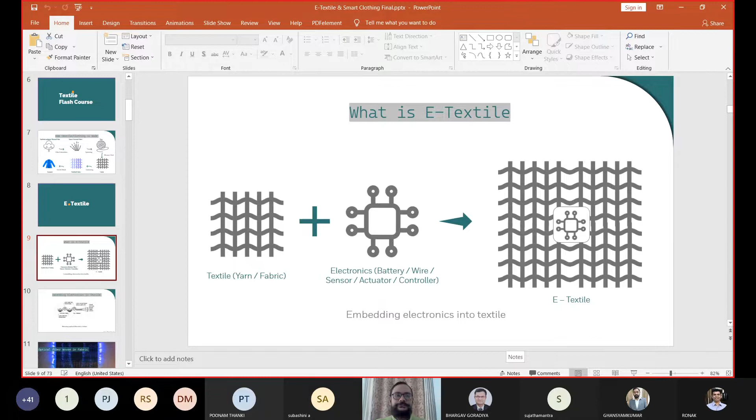So we are talking about this textile flash course. Basically, when we talk about textiles, it starts from either a synthetic polymer - like well-known polyesters, nylons - or natural fibers, like cotton fiber, which everybody knows about. Once we have this fiber in natural or synthetic form, we go for fiber extraction. Basically what we are doing here is extracting meaningful fibers that can be processed further. So these are straight and parallel fibers of a certain length.

This is done by the process of fiber extraction, and in synthetic terms it's done by melt spinning, or different kinds of spinning techniques. Then these fibers are aggregated together and twisted to form a long strand, which is generally referred to as yarn, or dhaga in your language. So this becomes now a long strand.

Once this long strand is available to us, what we do is a kind of gridding, an interlacement process, which can be called weaving. There are two types of fabrics, as you might already know. One, like in trousers, are woven fabrics, done through weaving. And the t-shirts you wear come from the knitting process, so these are more stretchy and flexible. These are the two processes of aggregating all these yarns together to make a structure which is almost a 2D structure, although it has a third dimension that we don't generally talk about much.

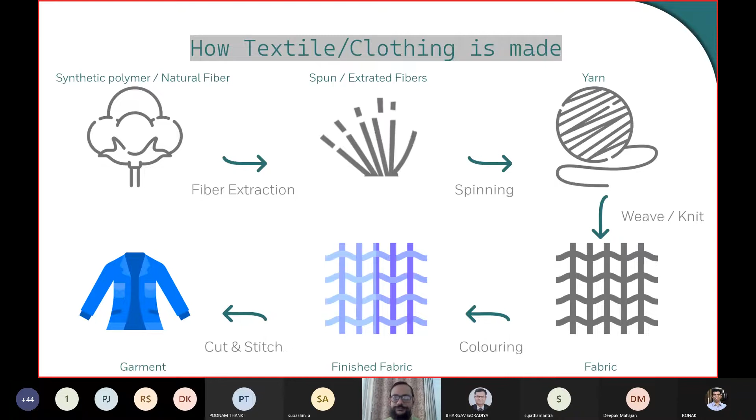So coming to e-textiles, what is e-textiles? A very basic definition - if you go by definitions on the internet, there are a lot of definitions and a lot of misinterpretation. A lot of people call a small patch attached as an e-textile, so there's confusion there. We've tried to keep it simple: you have a textile, maybe in terms of yarn, fabric form, or garment form, and then you add electronics to it - a battery, wire, sensor, actuator, or controller. Once you embed that into the textile, we generally refer to it as an e-textile.

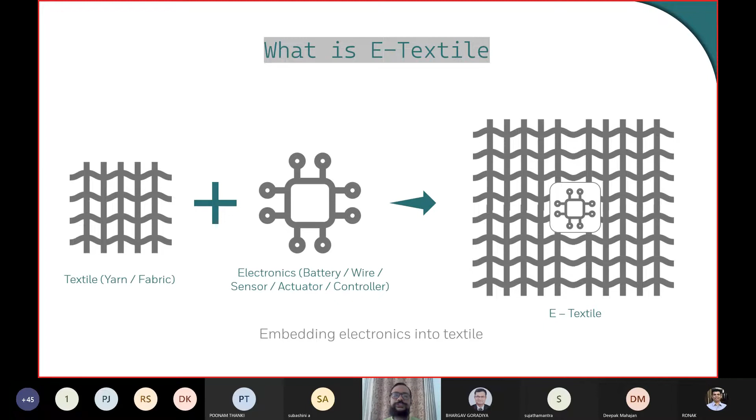Let's see an example. As I mentioned, in the process of weaving you have two different sets of yarns in two directions - X and Y directions. Here, we are using a polymeric-based optical fiber in the weaving process, and it gets integrated in the form of a fabric. Once integrated, you supply light from one end, and at some point where the bending on the optical fiber is enough, some light escapes due to the angle of reflectance, and that shows on top of the fabric. This is an example of how you embed an optical fiber and light-based system into textiles - an example of an e-textile.

As you can see in this picture, optical fibers have been woven with conventional fibers, and there's diffusion happening at certain places - these are the places where the diffusion occurs. This can give an aesthetic look, so this is also an example of an e-textile.

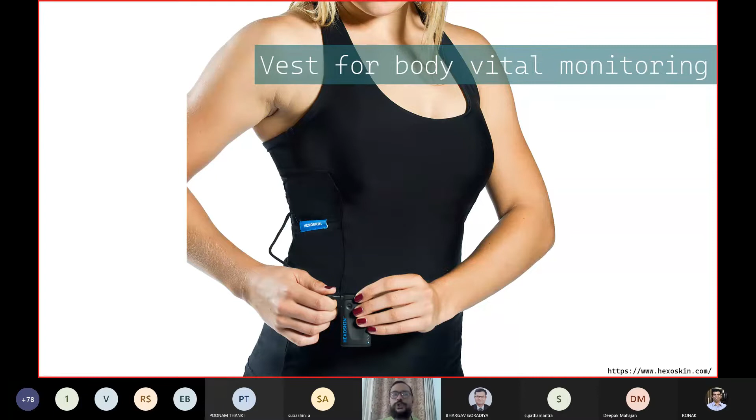Again, it's IP rated to an extent, but they don't recommend washing this along with the garment. These kind of textiles, the conductive threads and everything you see, are completely washable, and they can last up to 40 washes, 40 normal washes, or maybe if you're going very severely on a washing machine, maybe 30 to 40 washes. So again, it depends on the technology and how you do some kind of protection here.

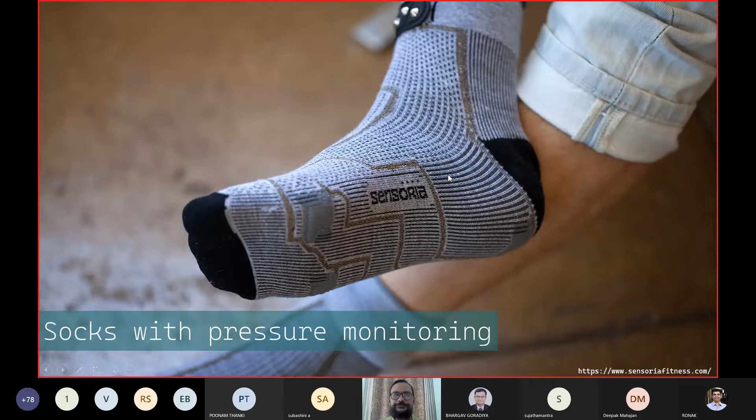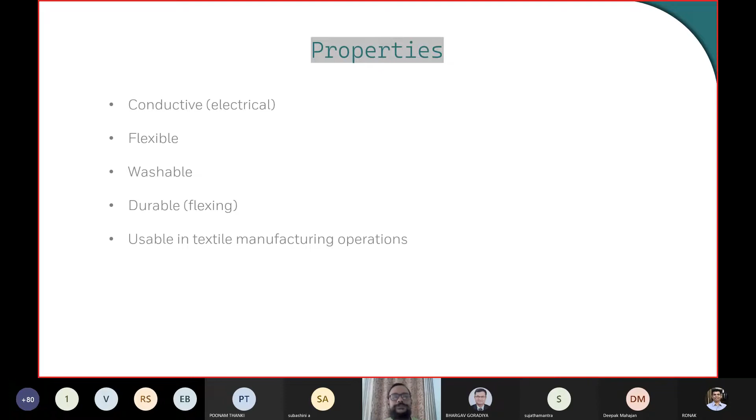So let's see the first category of the materials. These materials would be the basic ones. We start from the polymers, the conductive polymers. Examples are polyaniline, polypyrrole, and this is a very big name, so we use the short form PEDOT and PSS, polystyrene sulfonate. And then graphene. Graphene basically is not a polymer, but because graphene is used to an extent, I have just included it in this instead of making a different slide for only graphene.

So the conductivity values of these kind of polymers are in the range of the beginning of a semiconductor to the beginning of a metallic conductor. So these are not very highly conductive like copper and all, but to an extent they do a job of conducting electricity with small amount of resistance, and that should work for you to light up LEDs or any other kind of signal transmission and all.

The issues with this kind of polymer is that compared to the polyesters and nylons which we wear daily, these polymers have very poor mechanical property. So they will have to be supported. Basically what would happen is you would have a polyester substrate or a fabric substrate, which is the main load bearing component that would take the forces, and on top of that you can do some kind of coating of these kind of conductive materials.

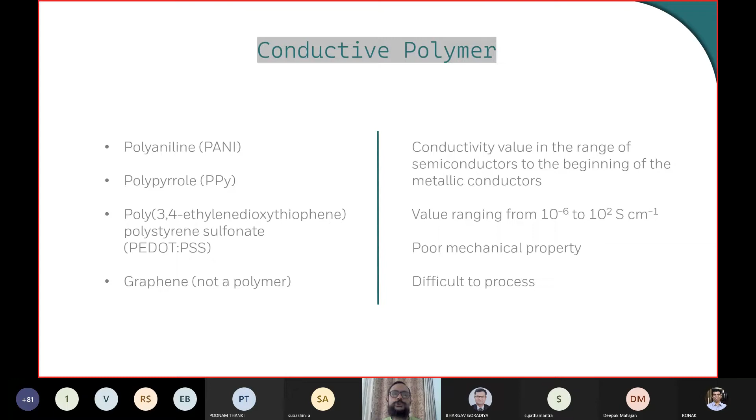One more disadvantage here is that these materials are also difficult to process. There is oxidization happening during the use, and also to coat it. They are not very soluble in the solvents, so if it is not soluble in solvents, it's difficult to process. That's why the processability of these materials is a little bit difficult.

Now, how can we use these kind of materials? What we can do is in situ polymerization on a textile substrate. What that basically means in simple language is that you have a textile in a bath or a solution wherein you are generating the polymer itself. You have the monomers, the individual units, in a solution. They put the textile in that and do the polymerization reaction. What that will do is a part of these polymers would be attached mechanically to the surface of the textile, so that way you are making a conductive fabric surface.

The other way of doing it would be coating it on a yarn or a fabric, or using it in a film form. Film form is easier to use because film casting and all is easier for these kind of materials. And coating, to an extent, again having it in a solvent, can be done on the yarns and fabric.

Wherever you need transparency along with conductivity, ITO is being used a lot in displays and such. A flexible alternative would be a PEDOT:PSS kind of polymer, which to an extent is transparent, not very clear, and depending on oxidation levels that can change. But this is a transparent conductive film which can be formed. To an extent, graphene is also sometimes used for this kind of conductive film application.

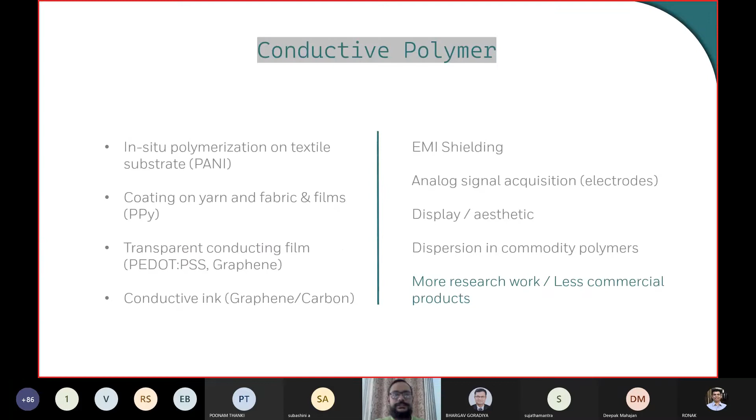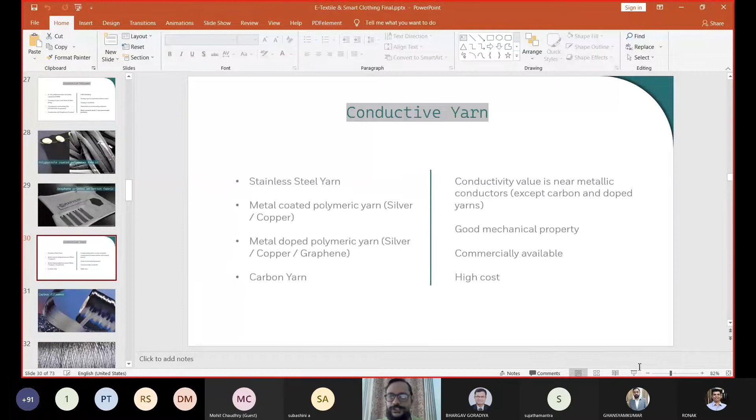So we were on this topic of conductive yarn. What are the options we were talking about? The first one was stainless steel yarn. Stainless steel can be processed into very fine strands, and you can make yarn out of it, and believe me, they are very flexible. The conductivity level is not up to the mark of copper, but it's similar to what you get in stainless steel or an iron kind of metallic structure. These stainless steel yarns are available in two forms: filament, which is a continuous strand with no disconnectivity, and fiber, like cotton is a small fiber — if you open up a cotton ball, similarly you can have steel as a small fiber. These small fibers are combined and twisted to form a linear strand, which is completely conductive, but gives a softer feel because a yarn made of small fibers has some bulk, which gives softness. So depending on what you need, you can go for a filament or a spun yarn — stainless steel is available in both forms.

Then we have metal coated polymeric yarns. The most popular among these are silver and copper coated nylon. So you have a textile base which is stretchable, and it has good durability as well.

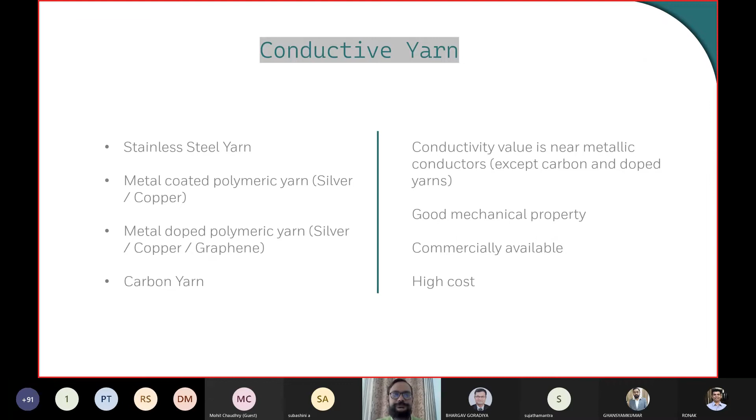Sorry to interrupt you, sir. No issue. Question is from one of the participants that you were talking about the coating of silver in cotton yarn, and the participant wants to know the thickness of the silver coating layer in cotton yarn to have a good performance.

Okay, I think this has come from Rachel. It's a very good question, and as I mentioned, these basically the coatings which are done here. I will show you the yarn also, don't worry. Let me answer that when I show you the picture. Please wait for a minute, 30 seconds or so.

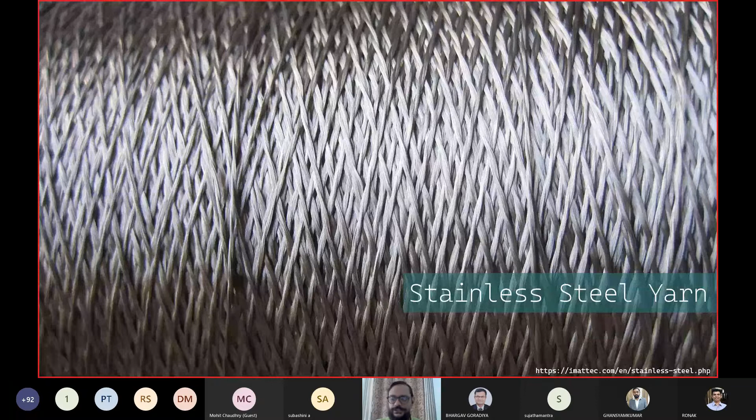Now, just to clarify, Rachel, these are basically not done on cotton. These are done, as I mentioned, generally on synthetic filaments or fibers, which are like polyesters and nylons, because of their durability and the ease with which you can control the diameter and all aspects of the fiber. In cotton, it is very difficult to have this kind of thing, and because of ununiformity, being a natural fiber, it is difficult to control the uniformity. There is a lot of hairiness. If you see a yarn of cotton, you will see a lot of small hairs coming out. So in such a scenario, it is difficult to process those kinds of yarn. Again, there are issues with cotton in terms of being more hydrophilic, so it absorbs water easily, and that also hinders the process. Synthetic filaments or polymers like polyesters and nylons are not so hydrophilic in nature compared to cotton.

So that's why it's also easier to process. Now, the thickness of the coating, I am not exactly aware about the thickness. It would be in some microns, and this is generally done by few companies which have these products, which are also to a level patented and secret. There are not too many companies making it, only a few in Germany doing this precisely. I'm not aware too much about Chinese supply on this kind of yarn, but obviously a lot of Chinese supply you will find for stainless steel yarn, which is very common.

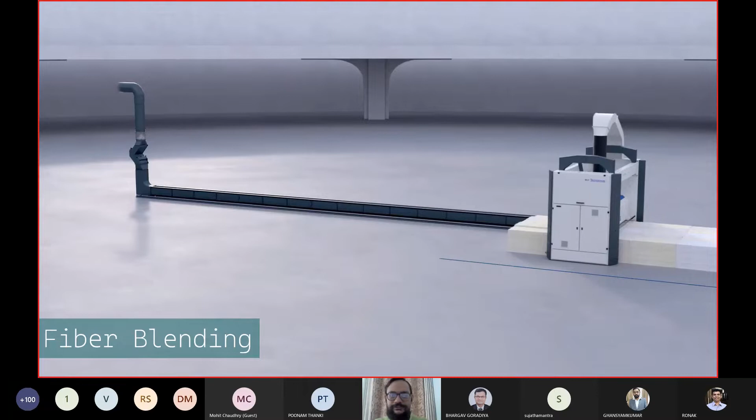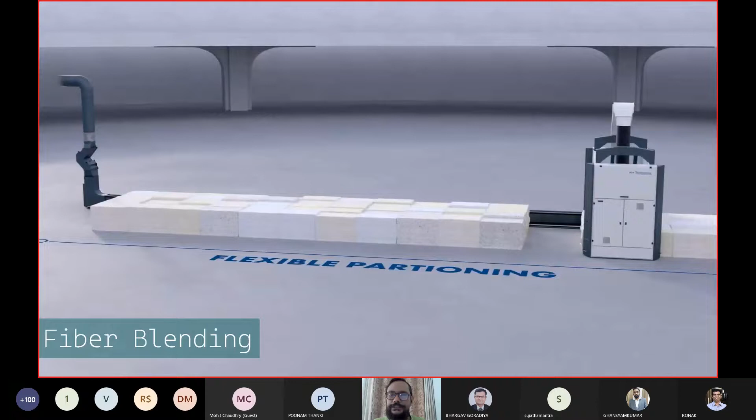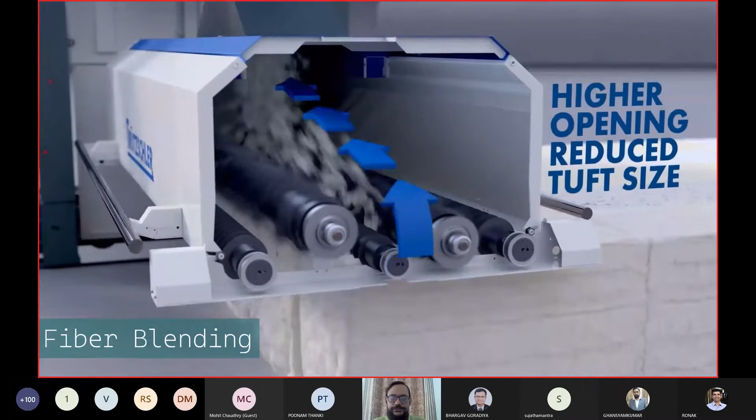Let's have a visual of how this fiber blending happens. You put different types of fibers—conductive and non-conductive, or conductive and base cotton—together, and these are mixed in the process. This fiber blending process is the start of yarn manufacturing, one of the steps in yarn manufacturing. It will take fibers from different bales. The conductive and non-conductive fibers are both stacked here, mixed and blended together, and once the yarn is made out of it, it will be a blended yarn.

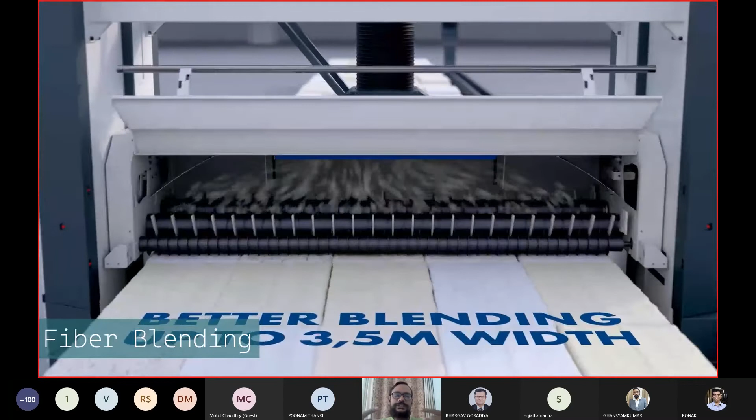Was this video visible? Were you able to see it, or were there a lot of issues? If anybody can just let me know. Yes, it was clearly visible. Okay, that's great.

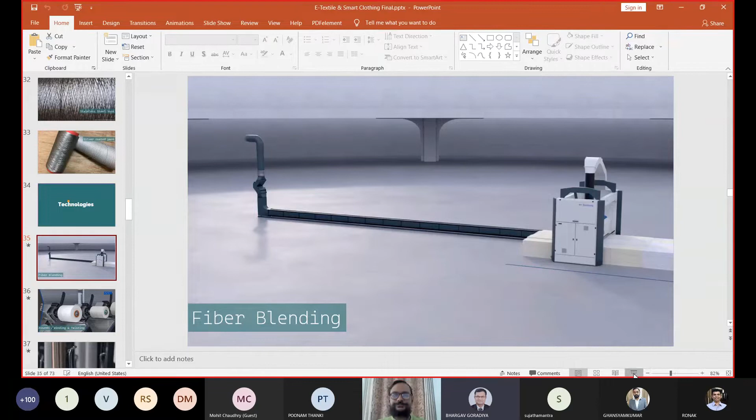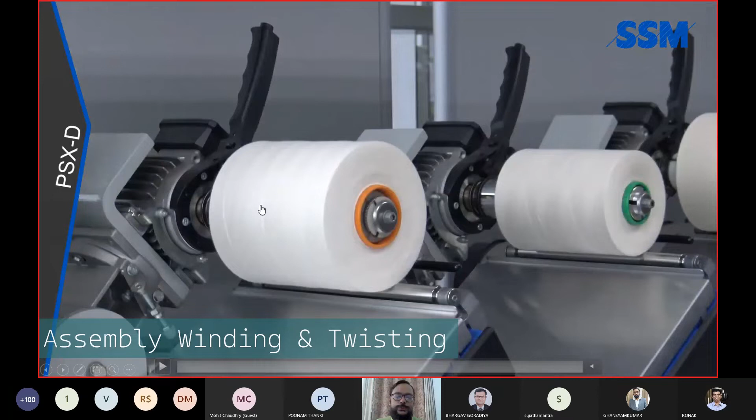Now, what you can see here is a yarn made from staple fiber, or it can be made from the spinning process. This is a continuous yarn, basically a continuous strand of polymer. Again, let's say you have a conductive yarn which is not very mechanically strong—for example, a silver yarn where you don't want a very thick yarn because of cost or other purposes. So it's a very thin yarn, and because it's thin, the mechanical property would not be there. So how do I use it in a garment or fabric? Because when the fabric is made, there are a lot of stresses on it, and this thin yarn will break.

So what we can do is have two different yarns: one is a thin conductive yarn with full conductivity running across its length, and there would be a non-conductive base yarn. Suppose you want to make a polyester fabric—you take a continuous filament polyester yarn, and these two are wound parallelly. Once wound parallelly, they form a single strand, and once the single strand is formed, you can twist it. Now your polyester base yarn provides the strength, and the thin conductive yarn provides the conductivity. Because the strength comes from the polyester, you are able to use it in any textile process or in a garment itself, where it will not break—it acts as a support.

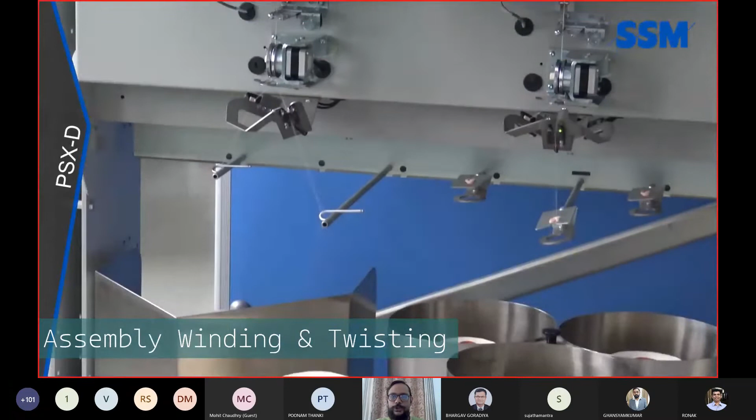Let's see how this happens. You can see there are two or three bobbins of yarn at the bottom. They are mixed together on this device, and then they are wound together. This is what we call an assembly winding process—basically an assembly of two different yarns. After assembling, we do a twisting so that they are locked together, and after locking, we can use it in any textile process.

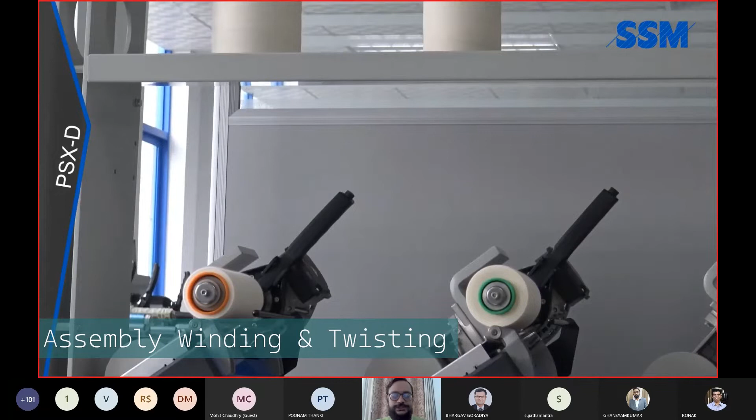Coming back to that washing question and how that Levi's jacket is being made, here's a small video from the Google Jacquard project itself. What it highlights is a braiding process, and we will see the whole conductive grid and how it is made washable. Let's go through this video.

Before that, let me briefly explain the braiding process so you can understand the video better. Think of shoelaces, which are made through a braiding process. Basically, 4 to 5 different yarns are put together and twisted to form a braid. These braids are hollow in between - if you cut a shoelace, there's a hole in it, not a thick strand. There are different types of braids. This braiding process is just twisting multiple filaments together to form a shell.

When you form a shell, in between you can pass your conductive yarn. So your conductive yarn is first protected from the environment, and second, it's not visible at all - nobody seeing your yarn would say this is a conductive yarn. Everything is covered inside. Let's have a video so you can realize it better.

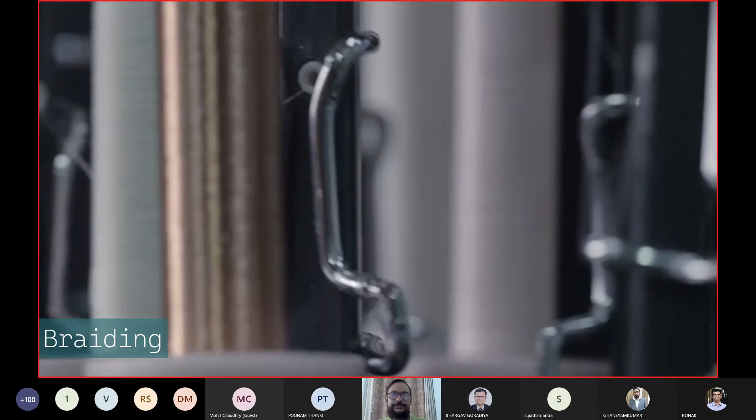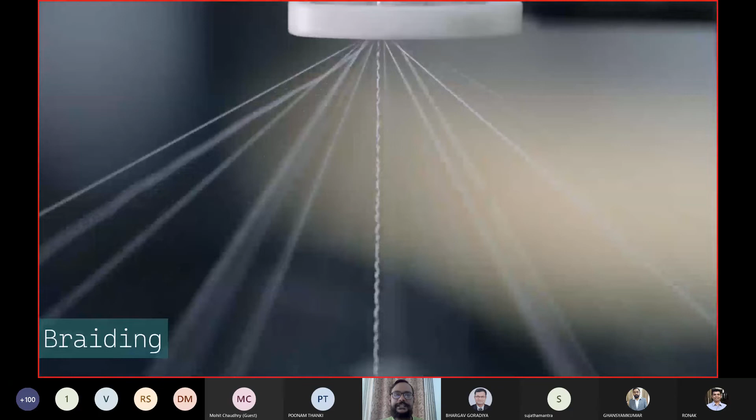You can see there is a center core yarn, and you are twisting something around it to make a braided yarn, and at top you get the result. You will never know this is a conductive yarn, but it is protected, and the conductive yarn is held inside the structure.

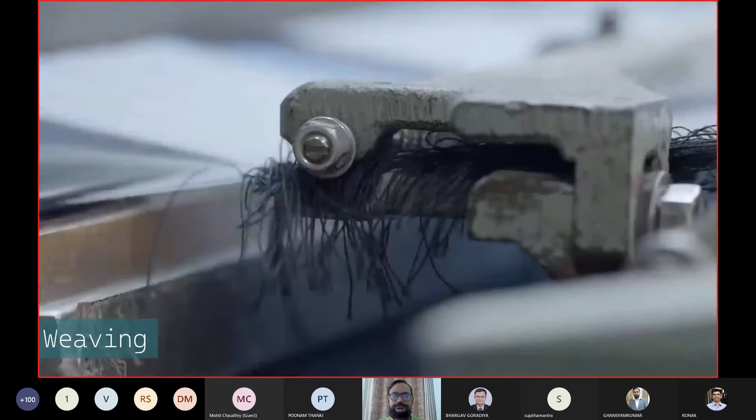As I said, the woven fabrics are like a grid - you have the X yarn and the Y yarn. To make that grid, they have put this conductive yarn at some interval. Because it's blue, you won't be able to tell it's a conductive yarn - the conductive strand is covered inside the blue yarn. They've done the same thing on the Y axis, forming a grid there too.

This portion can be used in a garmenting process, where these open strands would be connected to a PCB for gesture detection, and this part can be stitched onto a garment cuff - you can just stitch it on. And regarding washing, this is completely wash-proof since it's completely textile. You can wash it, flex it, anything is possible.

An interesting thing - when we saw those socks, they're basically made from a knitting process, which has flexibility in two ways. One is you can use different types of yarn - in the same process you can supply a conductive yarn and a normal base structure yarn. The second is you can do designing - any kind of patterns, or even shapes, since it's possible to make 3D shapes out of the knitting process. There are different levels of technology in knitting.

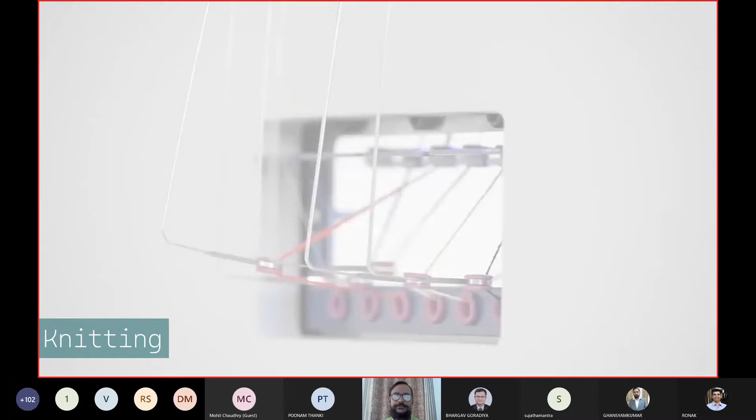I'm just giving you a brief idea about this knitting process. Different kinds of yarns can be taken and made into a structure. Knitted structures are similar to a t-shirt structure, which we wear.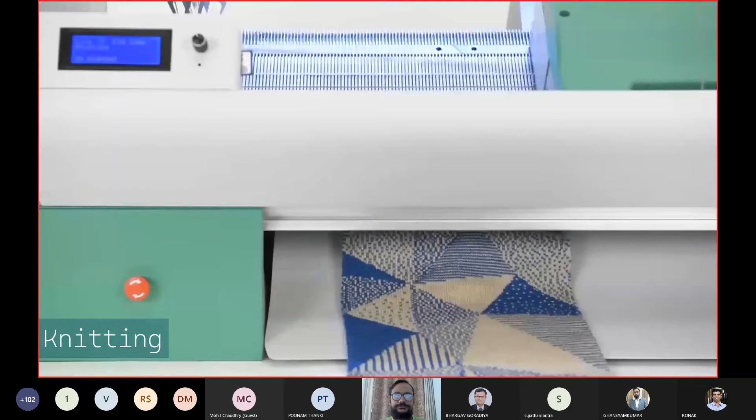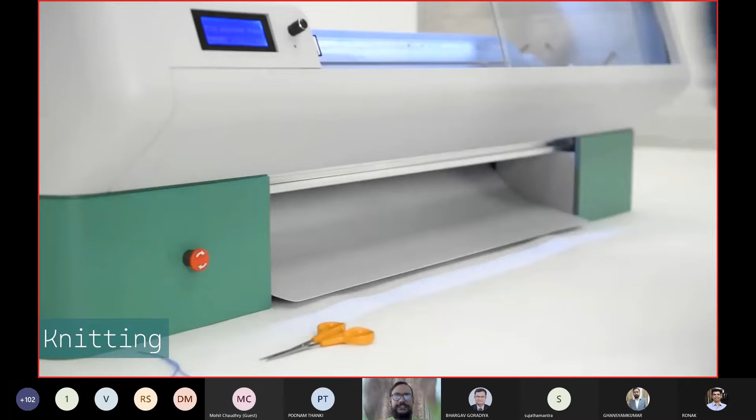This almost looks like a laser printer - these are some new developments in the machine. These are basically prototyping machines which some fundraising Kickstarter campaign people are developing for easy trials, mainly for fashion. This isn't for conductive materials, but you can use this kind of machine for making any conductive electrode or circuitry itself - you can have a circuitry in the design of the garment, in the fabric itself.

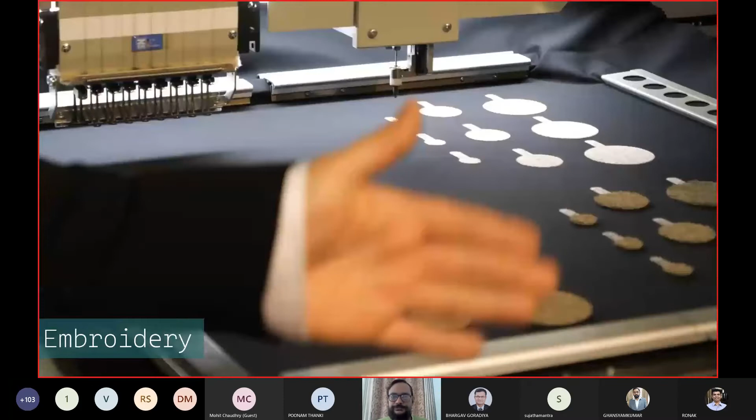Embroidery - most of you would know about it. A lot of ladies at home also do embroidery design with needles. Basically it's a similar process, but machine-based. Here, on a base fabric, which can be a clothing fabric, you are making an electrode with the help of embroidery. Let's have a look at it - they are using conductive yarns to make the embroidery so that it becomes an electrode.

Okay, so this is how you do embroidery. You had seen some of the electrodes already present there, and this is the machine which, if you can program, will do the embroidery in a proper shape. So these kind of machines are also available. This is also a methodology which can be used for designing circuits on a textile substrate.

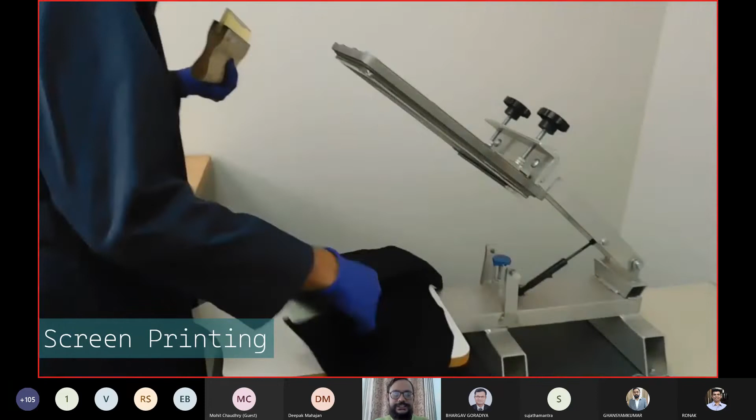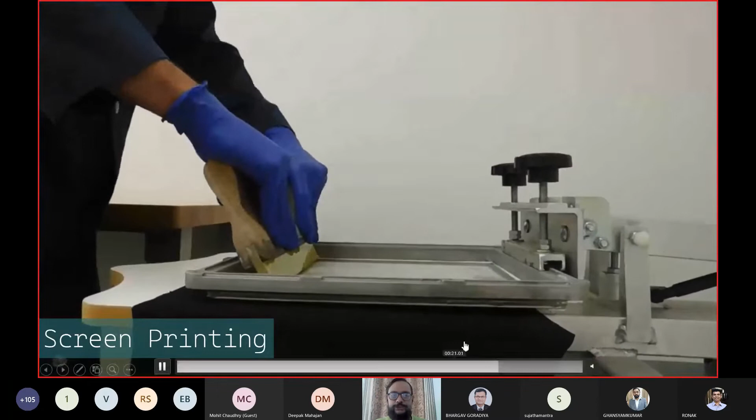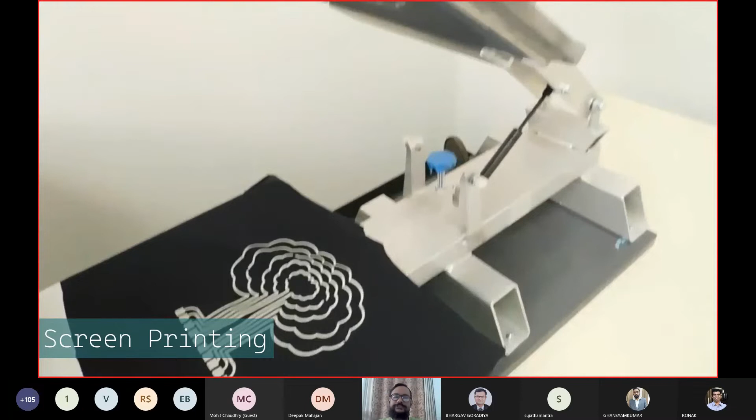Screen printing, I think you all know about it. Mostly even the hardware people know that, even the PCB has a lot of screen printing. Screen printing is also very popular in textiles. So this is textile screen printing wherein we have used conductive ink to form a circuitry. You just put the conductive ink and use a squeegee, and this screen will be having the pattern which has to be put on the fabric. So this is how you can see he has made a circuit on top of it. Now once that screen printing has been done, this has to go for curing and drying at a certain temperature, and once that is cured, that fabric and the ink itself become, to an extent, a stretchable structure which you can wear, and then you can have conductivity based on your traces.

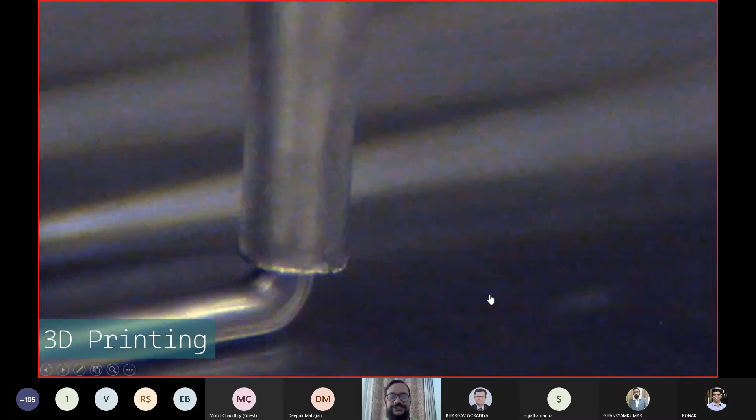3D printing, basically I would not call it too much as 3D printing, but the video had claimed it's a 3D printing kind of stuff. It would be something like 2D layering, but let's have a look at this. What is being done here is they have a conductive ink, and I believe this is mostly a silver conductive ink which is available, and then they are using a 2D system, a 2D head, which can go and form tracks, and they are making something stretchable here with the help of this 3D printing.

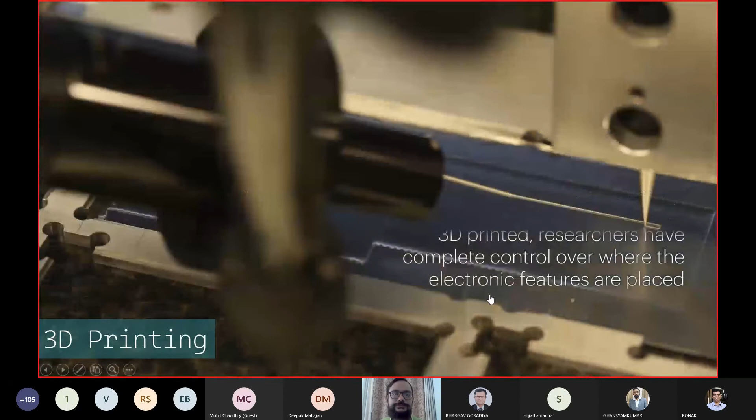Okay, so now you can see that there is some kind of flexibility which is possible in this kind of circuitry.

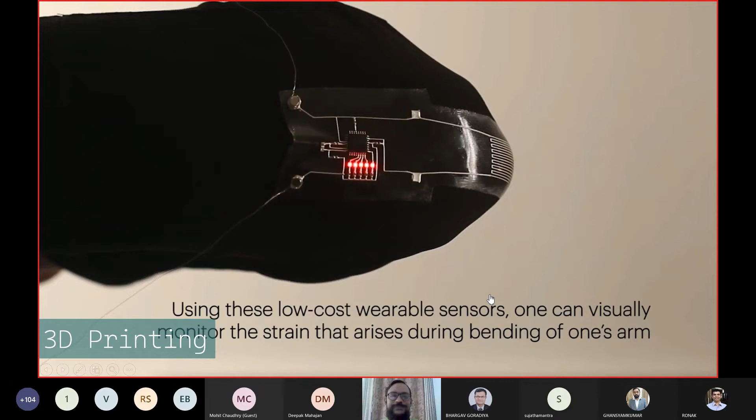One more method which you can use is heat transfers. Heat transfers are basically kind of labels or stickers which can be pre-generated from some kind of conductive material or ink, and then put wherever you want in your production. This is a production friendly operation. You stitch a garment and just put a heat press, put a sticker, and use a heat process to bind it together, and then your product is ready. You don't need to worry too much about it. So this is a simple process which you can use to make the garments.

So now you know what different kinds of methods are possible when you want to design your own wearable, whatever suits you, whatever is your requirement. Based on that, you can configure or modify it. I will just quickly check if there are any questions.

Okay, so there is a question from Mohit. What about interference such as electrical, magnetic, or when a person is traveling and there are jerks, but the person is not actually moving physically? Sir, can we iron these clothes?

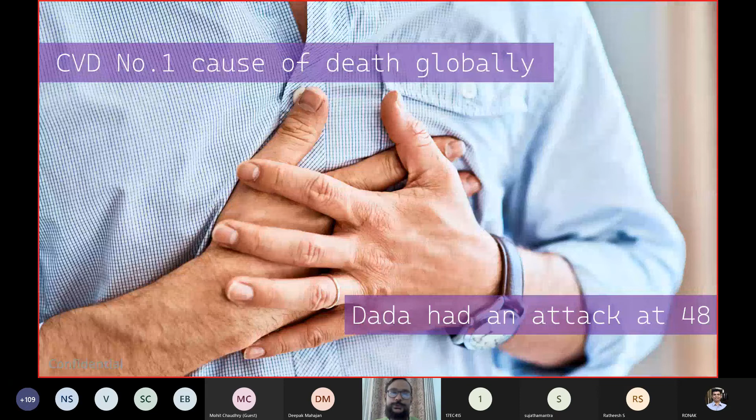Let's see the problem statement. Basically, cardiovascular diseases are still the number one cause of death in the whole world, so heart conditions are very important. Even Sourav Ganguly, who is a sports person and a fit person, at the age of 48 got a heart attack. So it's very difficult to detect, difficult to diagnose. A lot of precautionary measures have to be taken, and you never know who will get a heart attack. That's an important problem statement here.

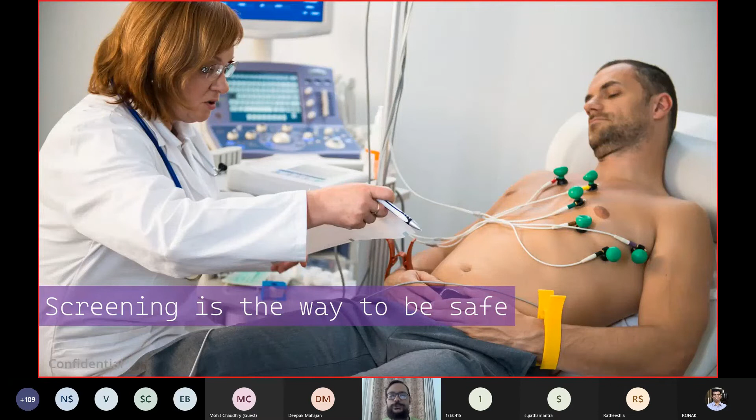The only way to determine that you are healthy is that maybe in a year you can go 2, 3 or 4 times and do your screening, and determine if your heart is in good condition or not. That's a way to be safer, but there are still some limitations to this process.

What we have is you need special equipment. If you are going for a 12-lead kind of setup, you will have a treadmill and a special setup is required. For people like us in cities who have access to internet and all, this doesn't look like a big issue, but when we talk about rural areas or villages, this is a far-fetched scenario. Getting an ECG done in some village is very difficult.

There's a need for a trained technician, someone trained enough to know which leads go where, what kind of analysis is happening, what kind of ECG is there, and what the interpretation is. One more issue is that in females it's difficult to put electrodes, so there's a privacy issue if the patient is female.

One more thing is the durations are very short. If you go to a hospital for screening, a lot of hospitals now have an ECG single-lead or 12-lead machine, stationary, not a treadmill one. They will just put it there with 12 electrodes and do a snapshot of, let's say, 1, 2 or maybe maximum 5 minutes—I don't think they even do a 5-minute snapshot. And whatever is printed on that slip is again almost a 30-second kind of data.

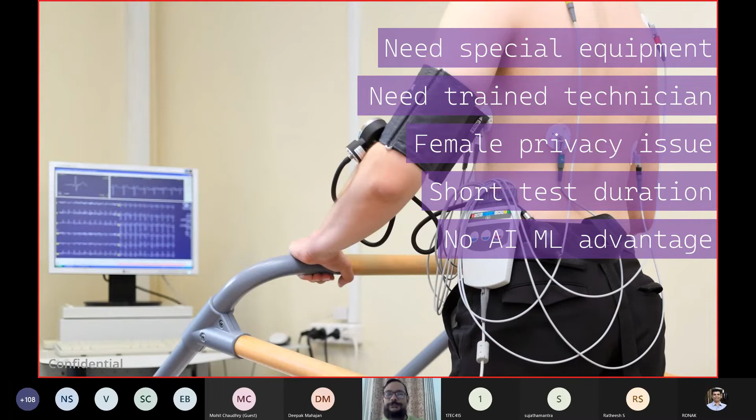Because of this individual hospitalized setup and no data collection, AI and machine learning algorithms are difficult to use. A lot of data is there, but it's segregated and not being used. And because AI/ML is not being used, the influence of medicine and all this cannot be studied. These are the basic problems which we see.

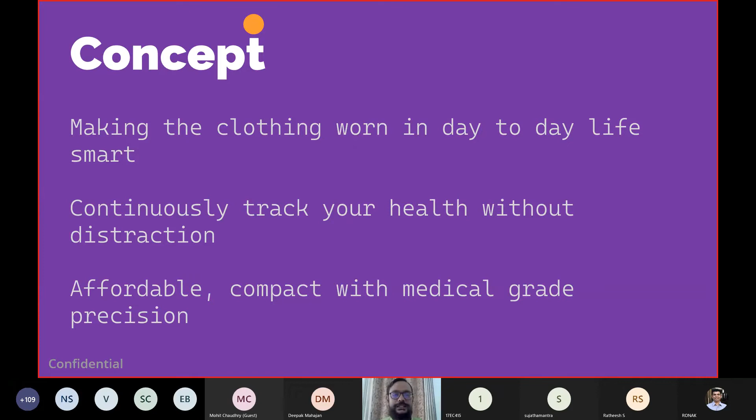And continuously tracking your health without distraction. So for let's say 6 hours or 4 hours, you want to monitor yourself and still do your own chores - your office work, or yoga and want to see the health benefits, or maybe climbing the stairs and you're complaining of some issue at that point - those can be recorded. And the next important point is it can be made affordable, compact, and with medical precision. So this was the idea behind this.

This is still being developed, the data analytics part, but you can maybe use it for something related to COVID also.

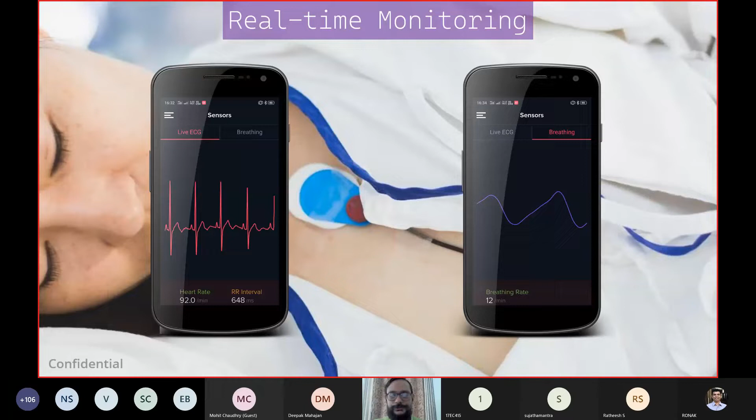So what are the features in this, how have we differentiated it? We have low motion artifacts - there was a question about jerks and all. With the jerks and all, we have tried to design this garment so that the electrode and skin contact are as intact as possible, so motion artifacts are less in the signal. We can run this for 80 hours of continuous monitoring of your ECG or plethysmography signal, whichever you want to use - so battery saving is also considered.

We have used a 4-way stretch fabric, so it becomes comfortable for the user to wear, does not provide too much compression, and all kinds of motion are possible. We will try to use the latest Bluetooth technology so that data transfer rates are good, so we can go up to higher resolutions of the signals.

We have tried to use a standalone mode in the device, basically to keep away the smartphone. A lot of the time your wearables will not work if your smartphone is not there. But this wearable we have designed so that if you want to keep your phone at home, you can, and there are buttons on the device which you can use to operate it. It doesn't have a display, but you have buttons you can use, and later when you want to sync or see something, you can sync it with your phone and display it. So you don't have to carry your phone for this.

We have also put an audio alert. As you can see, these are placed on the chest, so the LEDs would not be visible when the user is wearing it. So we have kept some audio alerts in the system.

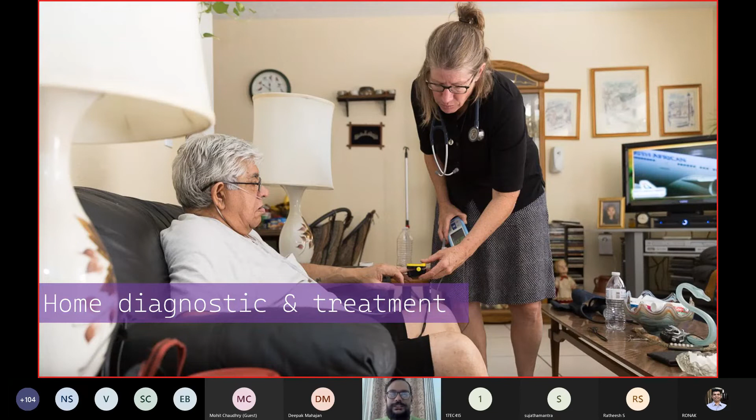So quickly going through opportunities. Home diagnostics and treatments are possible with that kind of a system. Let's say you have come from the Middle East to India for medical tourism, done your heart surgery operation, and now you want to go back and don't want to stay here for long. Under doctor supervision, you can go back, and then the doctor can remotely monitor you.

Tracking fitness and training, a lot talked about, a lot heard about, so nothing much there. Pre-insurance checkups can be possible, wherein currently if you go for a 50 lakh or 1 crore kind of insurance, you have to go for a 12-lead ECG treadmill test and all. So instead of just a small snapshot, if you want something longer, you can go for this, and companies can provide it to the user.

I have seen some models, I think in the USA, where they are providing some kind of wearables now for insurance checkups, to see whether the person is staying fit or not. And if he's not doing fit things, then they charge a higher insurance premium. These kinds of models are also coming up. Let's see how much they progress.

Telemedicine is obviously an option. And then we have sleep apnea monitoring. Because we have a plethysmography sensor, sometimes during sleep if there's irregularity in breathing or breathing has stopped, these kinds of things can be detected instead of going to a hospital, because right now, to detect sleep apnea, you have to go to a hospital, sleep there overnight, and then that data is collected. So the system can be modified and used for this sleep apnea kind of monitoring.

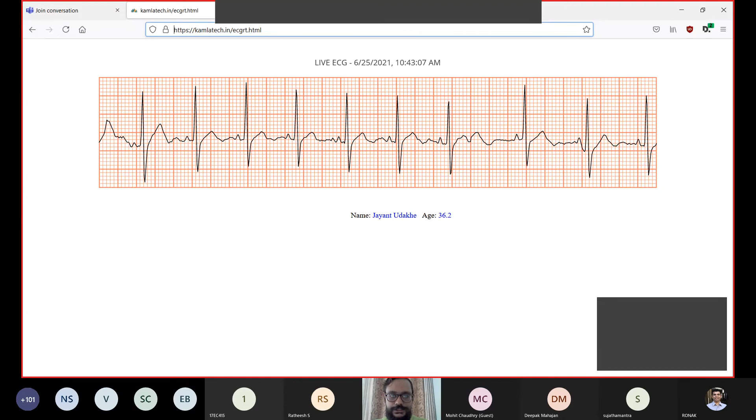I hope you all were able to check that, and now that has stopped, because there's only 32 seconds of ECG which I've set in the duration of the application. If you want, you can go for longer also. So I think that is all from my side. If you have some questions now, we can take the questions, and thank you for patiently listening to me. It's 2 hours sitting and listening is a difficult task.

Yes, thank you very much, sir. It was really highly informative and a wonderful session delivered by you. I have a few things, or rather, maybe, are you dealing anything with military clothing or military wearable kind of thing? Because many defense organizations in different countries are also doing the same thing.

So do you have anything to say about military wearables? Currently, sir, I have not done much work with military wearables. We have tried to push this product, so this is also in discussion with some officers in the military. But we have not got any specific requirements right now. I'm trying to connect with people on this in terms of if they have any requirement, but frankly speaking, I don't have much idea there. If we are talking about some wearables in military, I think that would be something on impact protection, if we can do something, or injury detection. I think there was some question on that, or maybe some kind of camouflage and all. So this can be something which is important.